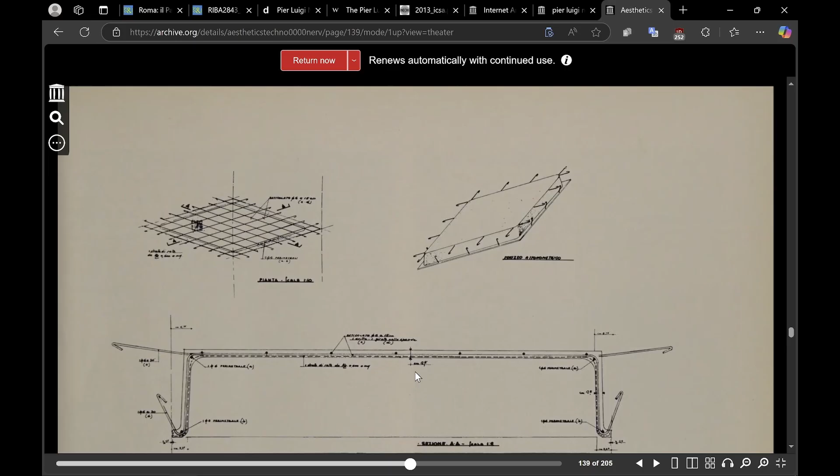And so if I scroll down here, this is the end result, obviously. But this is like his patent system. He used this ferro cement where you basically make this tiny thin mesh of reinforcing bars, and then you squeeze cement and sand together. And so it makes this very thin shell, right? And then you see here these little reinforcing bars stick out of it. And so you're basically casting the negative.

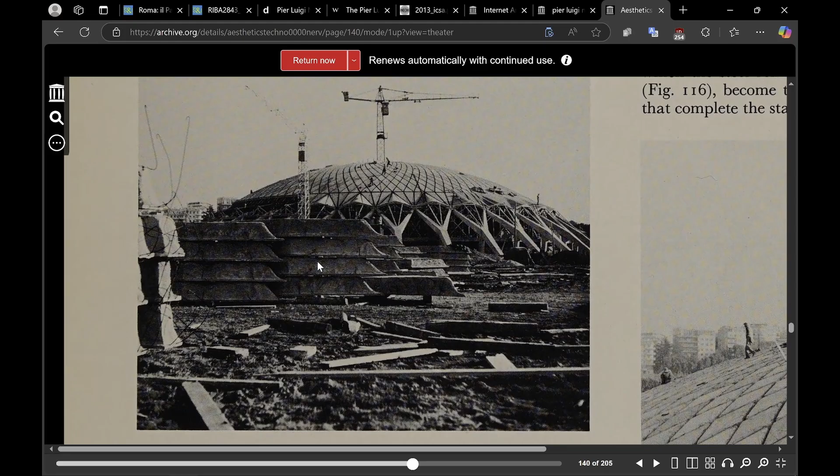And so if we go down here, you see right here, let me maybe zoom in so you can actually see what's going on. These are the precast members that are made from a mold. They're made from a masonry mold. And I'll go to another document to show you the masonry mold. But everything here is literally made on site and placed on site and poured on site.

And so it's just absolutely beautiful because the end result is so beautiful. But this is what I mean when I say it was done by hand. It's pure craftsmanship. This is parametric. This is like analog parametric. And I'm going to show you how to do this in Rhino, but in a very simple way. I'm not going to show you in Grasshopper. I'll just show you how to model it quite easily using very basic geometries and rules of geometry.

You could definitely model this in Grasshopper, but I am just going to show it to you in a very basic way. But again, these are people working on site, and these are the little reinforcing bars sticking out of the prefab parts, and then they would pour the negative, and that's how you get that ribbing. The ribbing is literally made by pouring inside this crevice here, right? And then they just pour the rest of the concrete over this, and the mold just becomes part of the structure.

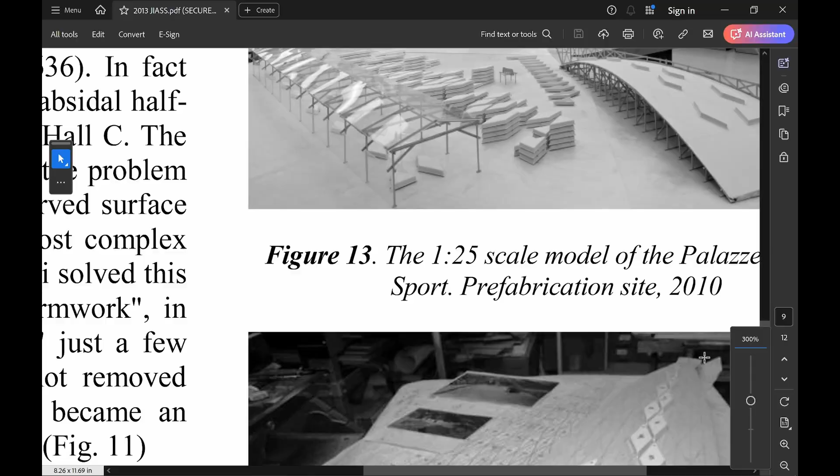And if I just go to this document here, you see this picture, it's just amazing, right? They're literally drawing on site, by hand, the actual profiles on this piece of wood here, right? And then they will build the formwork off of it. So let me just show you the mold that they make. Here it is. This is a really good photo.

Right here, they're using this mold. This would be like how you make a slip for ceramic, exact same thing. They're using this mold, and then they would build this little cage system here, right? And then they would pour, and these are the reinforcing bars, and then they would put the cement and sand together through this. And so you see right here, that's one of the molds here.

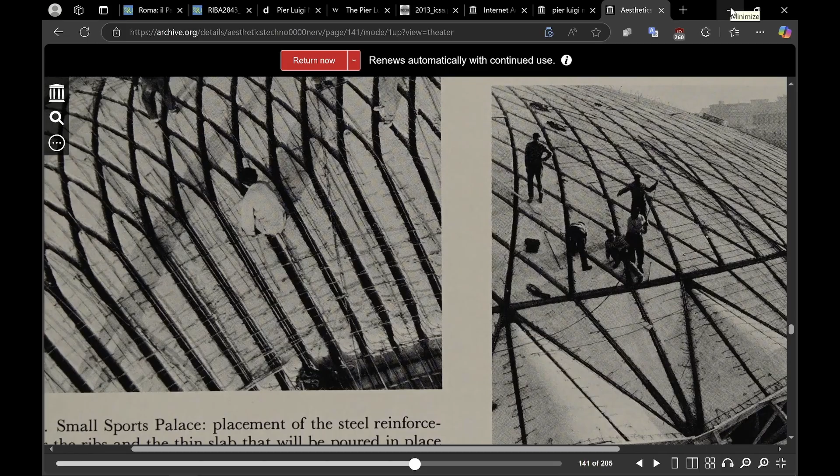This is absolutely phenomenal. So I'm going to show you how to build this in Rhino, and I'm going to keep it very simple. I'm going to use easy measurements. I'm not going to use the exact measurements. I'm going to use very close measurements. I might be off by like half a meter, because I just want to keep the numbers clean. I'm just going to use very simple measurements.

And again, I'm not going to go into a lot of detail about every tiny part, but I'm going to show you the main structural systems and how to model them in Rhino. So let's go ahead and get started. The first geometry that we need to establish is both the plan and the elevation. You can find a lot of plans online. I'll leave all my sources in the description.

The actual dome itself was first constructed from an approximately 49 or 50 meter radius sphere. And then they basically cut a chord off of the sphere to establish a 60 meter diameter shell from that sphere. So that's the first thing we're going to do. And if you look on the right here, I have very organized layers. You need to be very organized with this.

So the first thing I'm going to do is go to my curves sphere layer and make that active. I'm going to go to my top view and type in sphere. It honestly doesn't matter which image I use here. I'll just use this one for now, and I'll say this is my center right here. Let me turn my ortho on. I'm going to draw a sphere with a radius of, to keep the numbers clean, 50 meters.

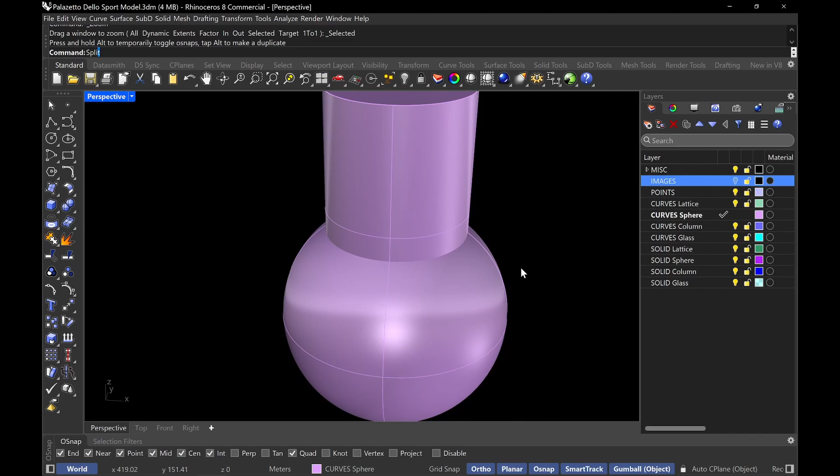Then I'm going to go to wireframe. Let me turn off the image real fast. Then I'm going to draw a circle from the center, and I'm going to give it a diameter of 60 meters. Now I'm going to take this circle and extrude it through the sphere to split it off. So if I do ZS, zoom selected, and I do split, there we go. This right here is basically the top of the dome. Great. Let me go back to top view.

Let me turn on the image, go to shaded. There we go. I can go to ghosted. So you see? Now, the next thing we want to establish is the actual boundaries of the structure. The outermost boundary is a 60 meter diameter shell. But the inner boundary of the lattice work is around 4.5 or 4.25 meters in.

So I'm going to dupe edge and offset in around 4.25 meters. Enter. Let me change the layer of this, put this on solid sphere. Now, this lattice work that you see here is made from a system called a Lamella dome. There are a lot of different types of lattice dome networks, and one of them is called a Lamella dome. And even among Lamella domes, there are different types.

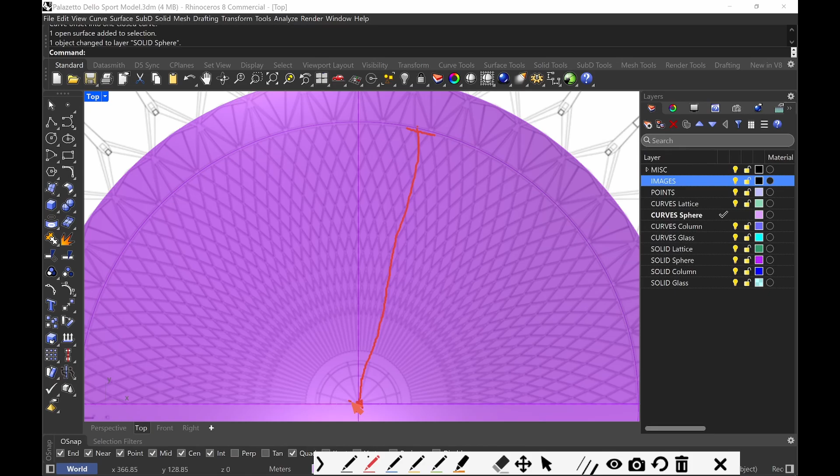We don't even need to trace this plan. I'm just using it as a cross-reference. But basically how it's constructed, let me turn my annotation on. If this is the radius right here, from here to here, we have this radius. The arc is basically the same radius as this inner circle. Or another way you can think about it is the distance of the arcs is equal to half of the radius. So this distance here is equal to 1/2 of this distance here.

And this is divided by 108 lattice works, and it has about 36 columns. So if I do divide, let me go to my points. So these are 108, but right now it's going in between every other one, but that's fine. I can just press enter, it's grouped.

So these, I need to rotate them about 5 degrees. Every column is about 10 degrees. If I turn my image back on, each of these columns is coming at like 10 degrees. But every other of these lattice works are at half of that, like 5 degrees. I can literally just rotate this over 5 degrees if I wanted to. See, I just typed in 5 degrees, and now I rotated 5 degrees.

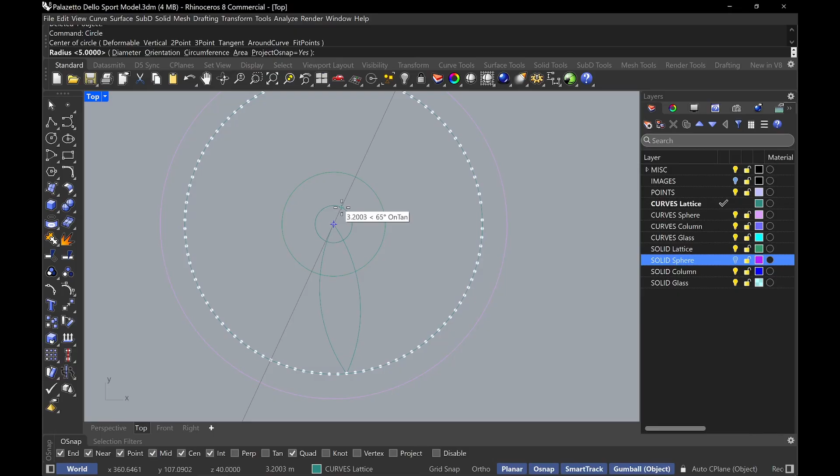Okay, the next thing I'm going to do is I'm going to draw a circle. That's like where the start of the cupola beam is. And I'm going to give it a radius of around 5 meters. And I'm going to offset it again 0.85. Like that. Okay, and then I'm going to draw a line from here to here and draw a line from here to here. Okay? And then I'm going to trim this arc off like that.

Okay? So this is what we have. So this is like the straight edge here, right? You see? And so I'm going to trim this off now. I'm going to trim this like that. And then I'm going to join these two together. Join. And I'm going to offset B for both sides, 0.06. Like that. So we have this.

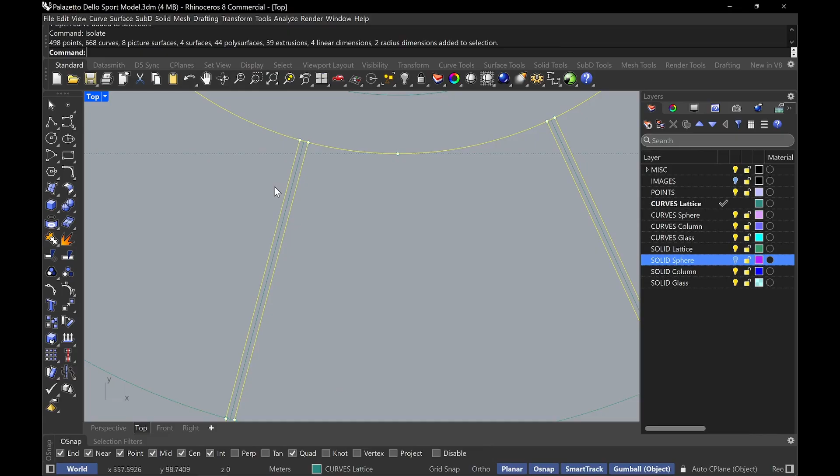Okay, great. So now what I want to do is actually, I want to do the curve Boolean command. So I'm going to select this, and I'm going to select these two curves. I'm going to do isolate. Okay? I'm going to do curve Boolean. And I want my output to be curves, right? So select curves. And combine region, yes. And I'm going to select inside of here. Enter. Great. So now I get like this closed curvature, you know?

And I'm going to unisolate. So we have this. So I'm going to select this one here. And I'm going to select these curves as well. And I'm going to project them onto the surface. So I'm going to turn on my surface here, my sphere, like that. And I'm going to do project. I'm going to project onto here like this. Great. And so if I go and I do ZS, zoom selected, we have this piece here, which I want. You see how it's closed off?

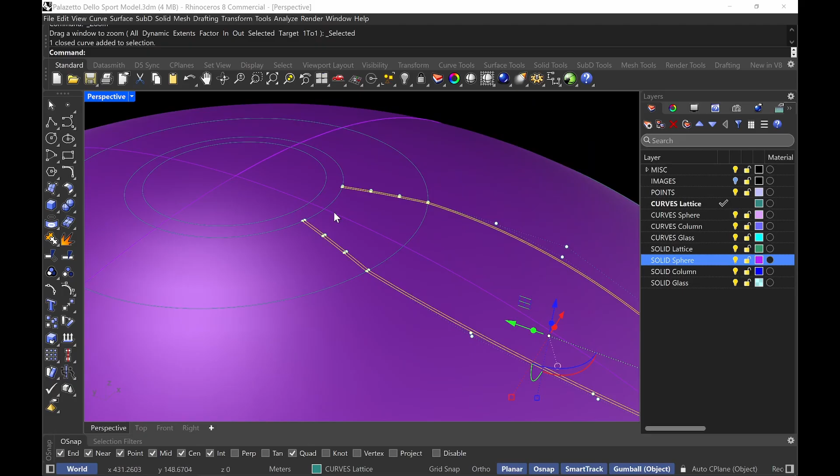Now, what I want to do is I want to copy this surface and paste it. Control C, Control V, okay? And I want to split this surface with this. If I do split, I want to split that with this piece here. Like that, okay? Fantastic. Now, I'm going to delete this, right? And now we're left with, you see how we have this surface piece here? Right? Let me change this to solid lattice. Okay?

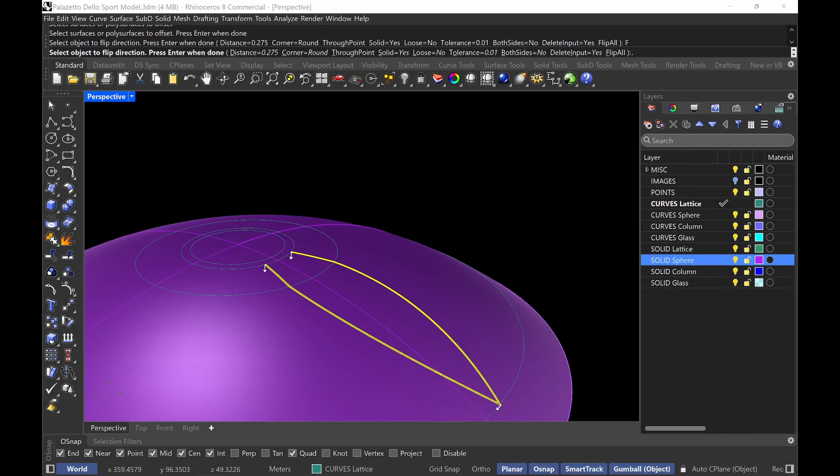And then I'm going to offset surface. And I'm going to select this surface. Enter. You see that I'm going to flip the direction. And the lattice is about 0.275 meters or 27.5 centimeters. Enter. There you go. So if we look underneath, you see? And it's a solid. And it's perpendicular, right?

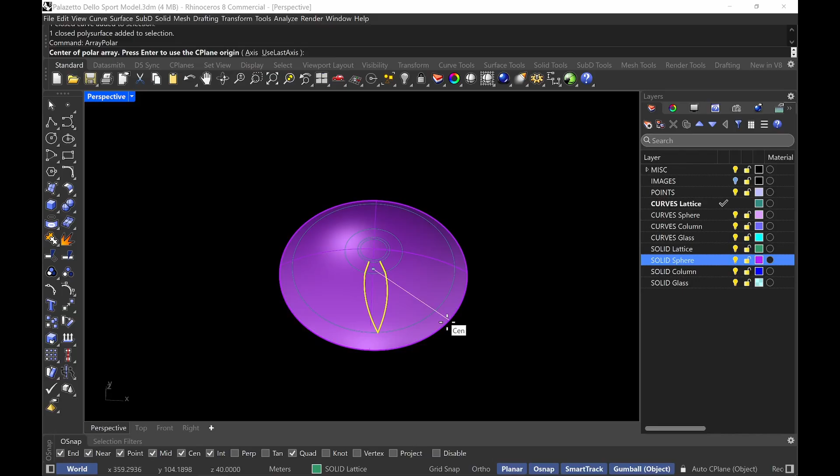So now if we do array polar for this. So you do array polar. I'm going to select the center, 108 times, and just accept 360 degrees, enter. You get this. You see? So let me just go ahead and hide the sphere for a second. So this is what we have. Right? I think it looks very beautiful. I mean, this is looking, in reality, right? These are kind of curved.

These are curved. I could have filleted before I projected it. I could have filleted this, but I just didn't feel like doing that because I just want to show you the basic principles of how to model this. Okay? Right? And let me just change the... I think it looks beautiful.

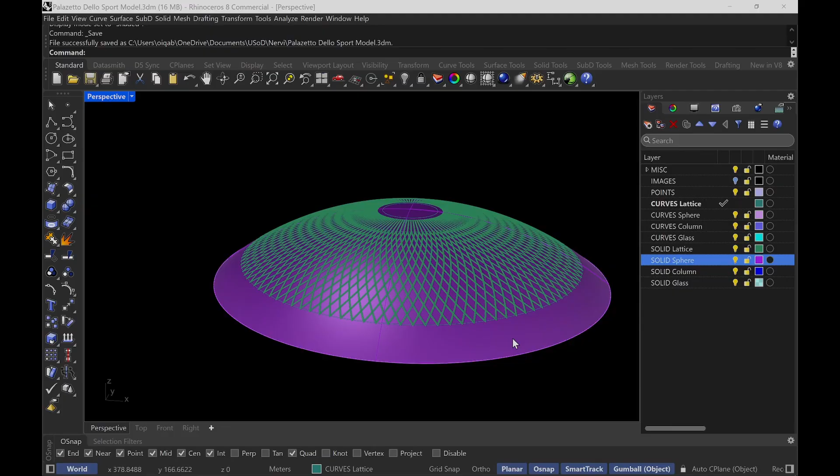Okay, so that's like the main lattice work structure. I'm not really worried about this piece. It's pretty easy. I can just split the surface, you know, and have that there. So we'll model that real fast. But this is like, you know, probably like 60% of the model. The next is going to be the columns, you know. If you notice, I haven't given a thickness to my sphere yet. I'll do that very last. But the sphere is around like 3 centimeters thick. So let's just go ahead and do this solid piece here. That shouldn't take that long.

So if I go ahead, again, I'm going to copy this, paste it, and hide it, because I always want to keep the originals of my geometry. This is just a basic modeling practice. I always like to keep the originals before I do anything subtractive. I can keep my history command on, but just in general, I always like to keep originals of surfaces before I give them thicknesses or before I do subtractions or Booleans, just in case I ever need to go back.

So this here, I want to split this with this circle here. So if I do split, select object to split, I want to split it with these two right here. Okay, so now we have this surface here. Okay.

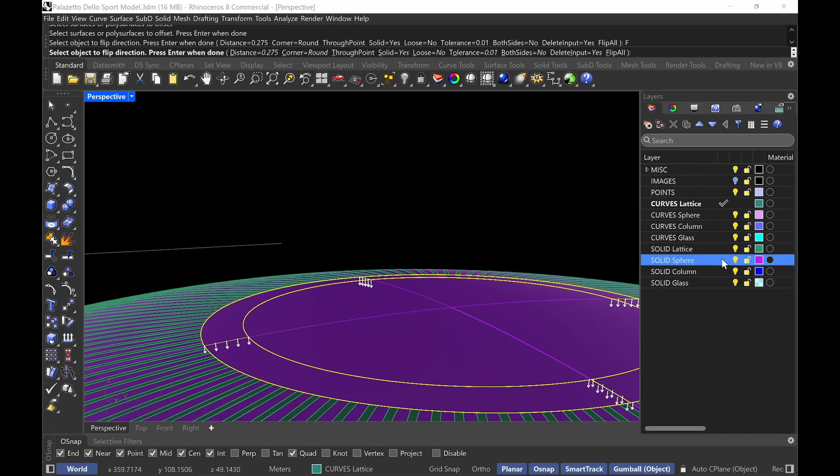And I can just offset surface down the same thickness, offset surface. And when we just flip it, the distance is already saved. Let me just make that active so it keeps it. Cool. I can hide this. Like that.

Cool. Now the next thing that I want to work on is the petals, the petaling of here. Okay? So if we look at the petals, look at this photo here, it's these right here. I have looked at a couple photos to determine whether this is curving or not. It's pretty hard to tell because in some photos it looks like it's curving. Other photos it doesn't look like it. Some photos it looks like it's a continuation of the sphere. Other photos it doesn't. But when you look at the actual interiors, let me just toggle through here.

You notice like a camber. You see there's like a camber to this. There's a slight arching to this. If I zoom in on here, you see? It's not the same distance all the way. There's a camber both on the bottom and on the top. So I'm just gonna assume that it's also a projection of the sphere. This is another photo, but you see how the thicknesses and the depths are kind of changing. There's again a camber to it.

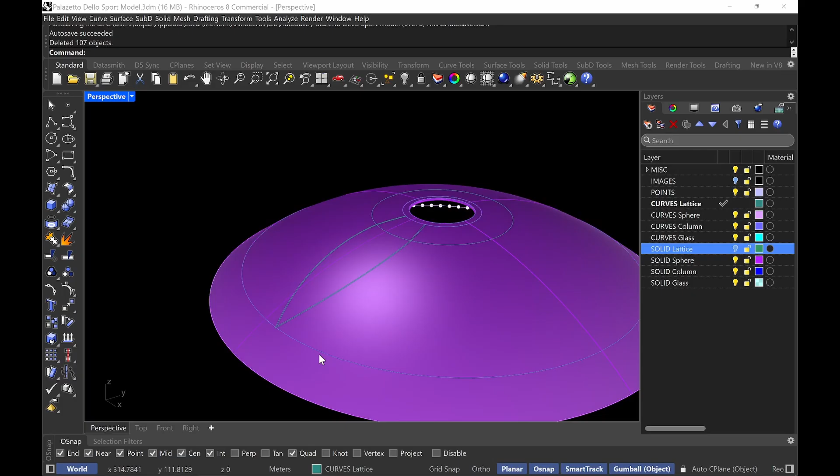Okay, I'm actually going to divide these. There's 36 columns on here. If we look at the image, any of these, there's about 36 columns. Okay. I'm going to divide this by 72 points because I need to go to the in-betweens as well. So there's 36 of these, but the columns are forking, right? It divides itself. So you need to divide it by twice as much to find the reference points. And the same thing with the petals.

So if I divide this, let me make my points active. I'll make that 72, right? So you see what's going on. You see? Now, what's important to understand is that it's around a 60-meter diameter whole, okay? In full, it's 60-meter diameter.

But it is actually pushed back like half a meter here. It pins forward and pushes back, goes forward, pushes back. So we need to offset this in a half a meter. Offset 0.5 meters and go in here like that. And then I'm going to project this up as well. So I'm going to project this onto that like that. Okay? And I can also divide this by 72. Like that. Enter. Okay.

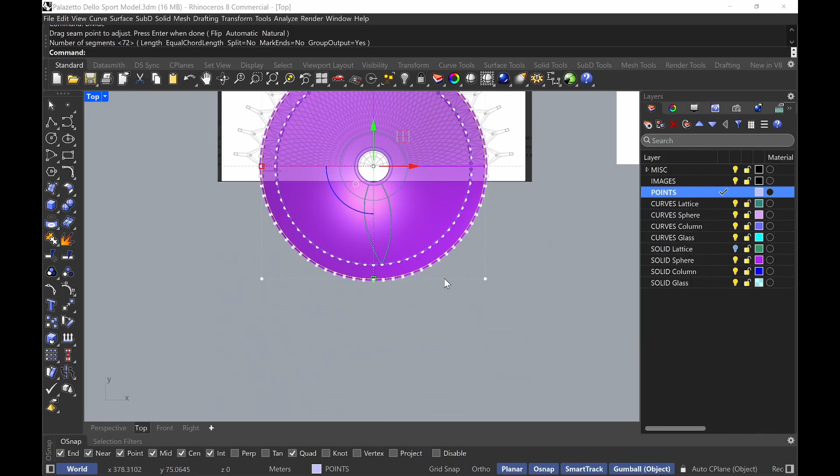So I know that the difference between this point, if I sketch this out, the difference between this point and this point is about 1.5 meters. So I can draw a line out from the center and go down 1.5 meters. That's one method. Or I can just subtract the total height distance from 1.5 meters, which gives me a difference of like 1.36, right?

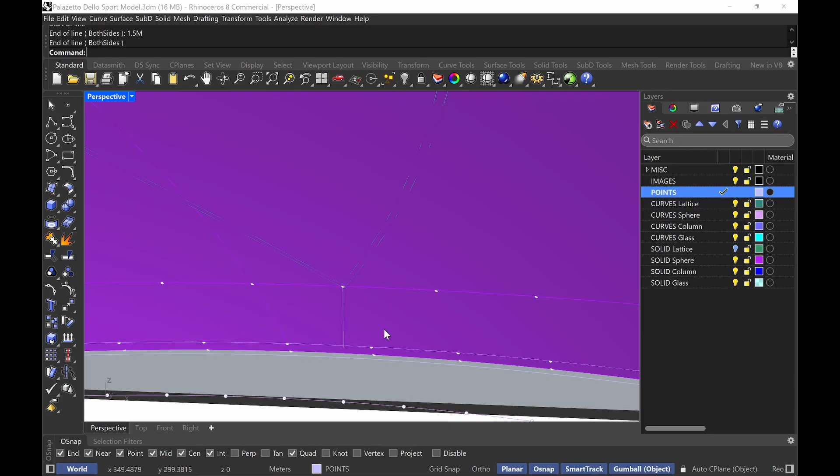So for example, if I draw a line vertical from here, and I go down 1.5 meters, right? This difference from here to here is what I'm looking for, right? So if I get a distance, it's about 1.3595, right? So honestly I can just draw that line. Vertical from here to here, okay?

And I'm gonna move it. So this is the high point, right? So I'm gonna move it here, right there, to this point, okay? Cool. So now what's going on, let me go back to shaded and turn this off. So what's going on is this line goes like this, and this line goes like that. You see? Okay, great.

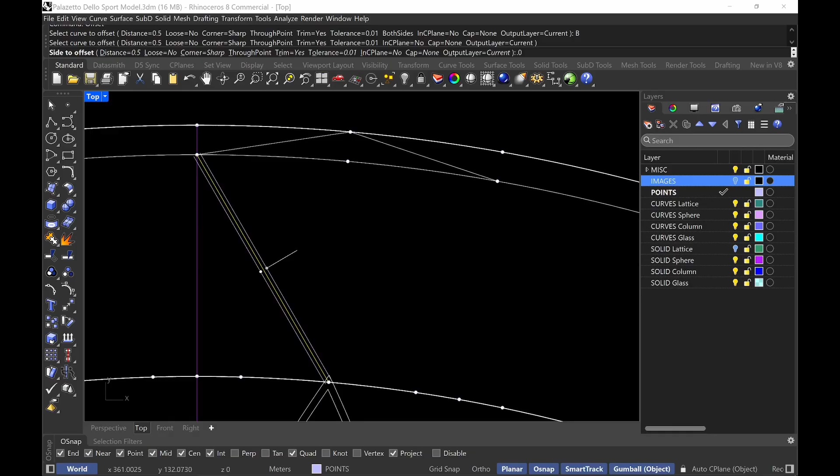So now for these lines, for the structure, I actually want to go to my top view. Okay? So if I go back to my top view, go to wireframe, and I'm gonna turn my project on. I'm gonna draw a line from here to this point, right? And I'm gonna offset both sides 0.5, like that, right? So it matches this.

So then I'm gonna draw a polyline from here to this point here. And then I'm gonna draw another line from here to here. And then also I can draw another line from here to here. Or I'll save that. And then offset both sides like that. I want to clean this up a bit, right?

So I'm going to go ahead and select some things and isolate some things. So I want to take these curves here, and let me go to perspective view real fast. So this is projected down. Don't forget we have project on, so it's drawn on the CPlane. And I want to take this curve here and this curve here. I'll take these points, and I'll take these points as well. And I'm going to isolate.

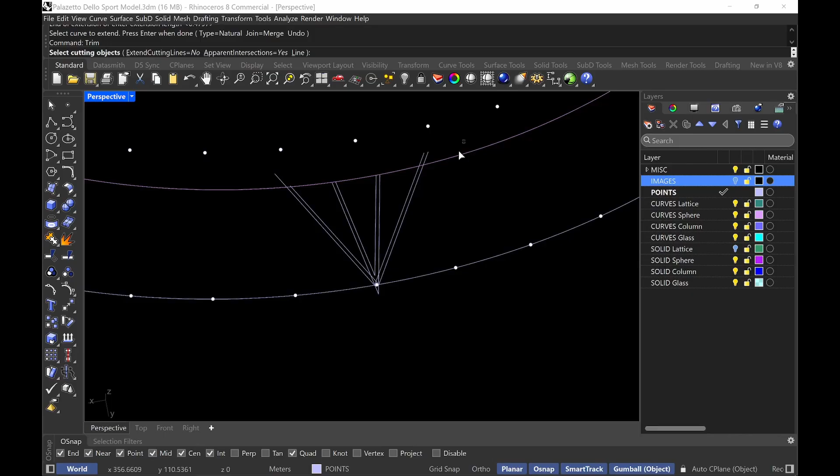I'm going to grab this and just pull it up to, let me turn project off. I'm going to pull this up to here like this. Great. You see? And I'm going to just clean this up. So I don't need these center lines anymore. Like that. Let me just extend these out. I can do curve Boolean and combine these all as one. Let me just extend all these lines out.

Okay, and then go to top view real fast. Curve Boolean. Select this. I want to make sure combine regions is on, output curves, and I can just select everything here like that. You see? It'll basically give me a closed curve. I can show you real fast. You see?

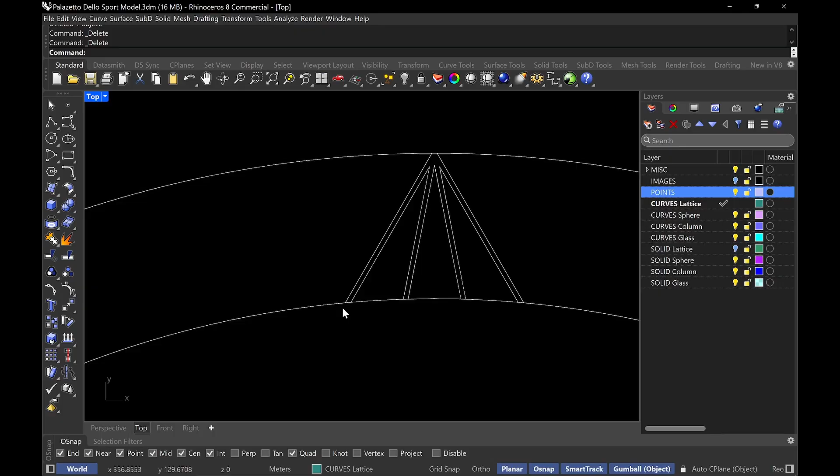Let me just do hide swap real fast. Right, I'm going to turn solid sphere on. Let me hide this top portion here. I'm going to select this. I'm going to project this onto this. Right, so we have this. Again, I'm going to control C, control V, and I'm going to hide, and I'm going to split this surface with that. Just delete, delete, delete, delete. Okay.

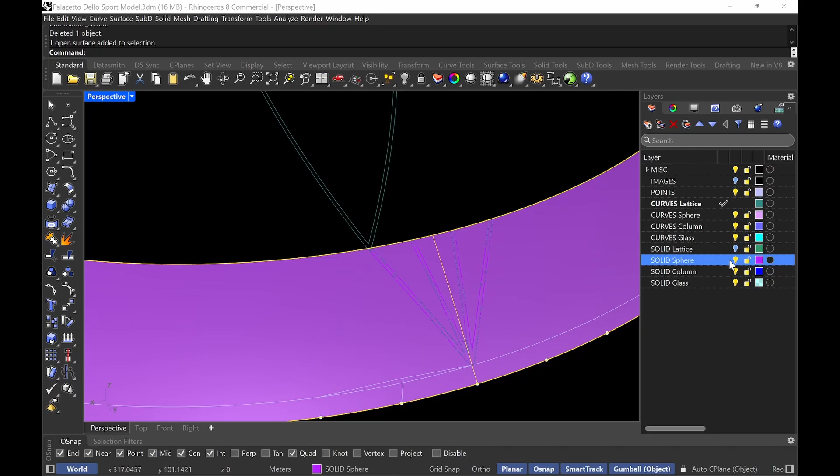The reason, just so you can quickly understand, let me change this surface, turn this back on. So we get that, right? And then I can offset surface, flip it. Again, it's going to be 0.275, like that, right?

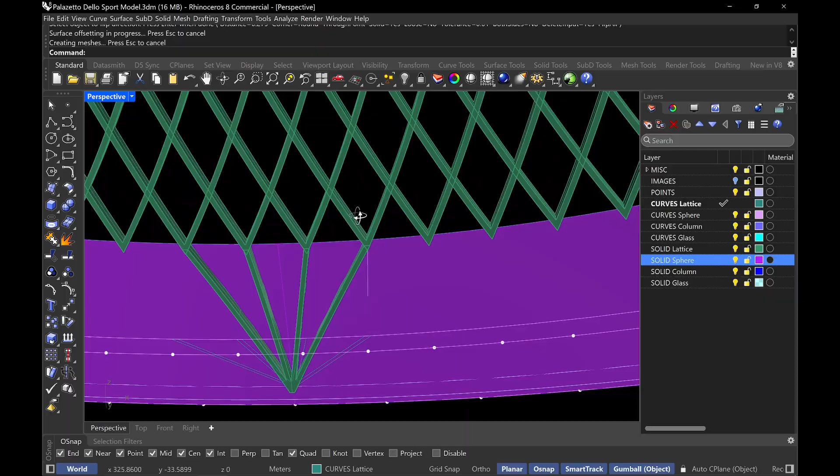And then I can array polar from the center, 36 times, 360, enter. Now we have this. You see? We have to do the petals, but this is the beginning of the petals. So if I do hide swap real fast, let me see which one I want to take. That one. Hide swap. Right, let me just go here.

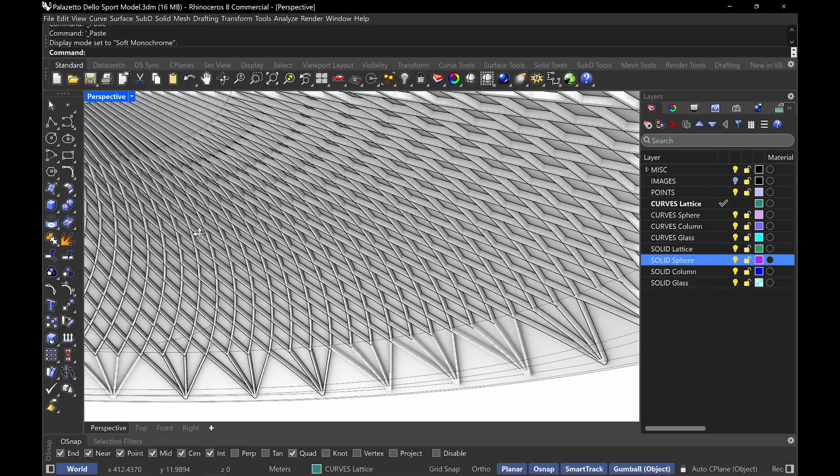So if we go here, we use this as our model. I'm gonna turn this off for a second. Just keep the lattice work. And let me do hide swap again and grab my points because I hid them. Let me grab these points here. Just do hide swap. Okay. So there's this curve here that I want to take. So I'm going to draw a line from this point here. I think I have these points in it as well. I should bring them back. Right.

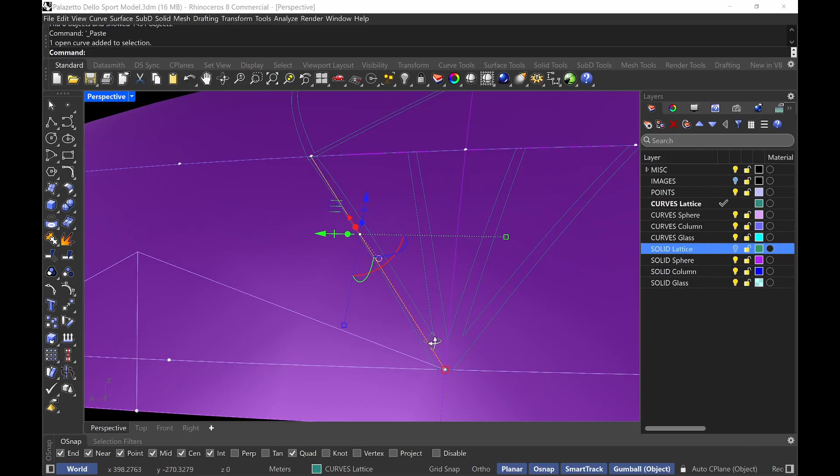So I want to project this onto here, like that, okay? And then I actually want to draw a line from here to this point right here, like that, okay? And now I can do a couple commands. I can do edge surface, network surface, sweep, loft, a lot of ways I can do this. I want to do the edge surface command, because you have to have open curves.

So I can select this curve and this projected curve here, right? And I'll get a surface like this, okay? Now, what I want to do is I want to actually mirror this.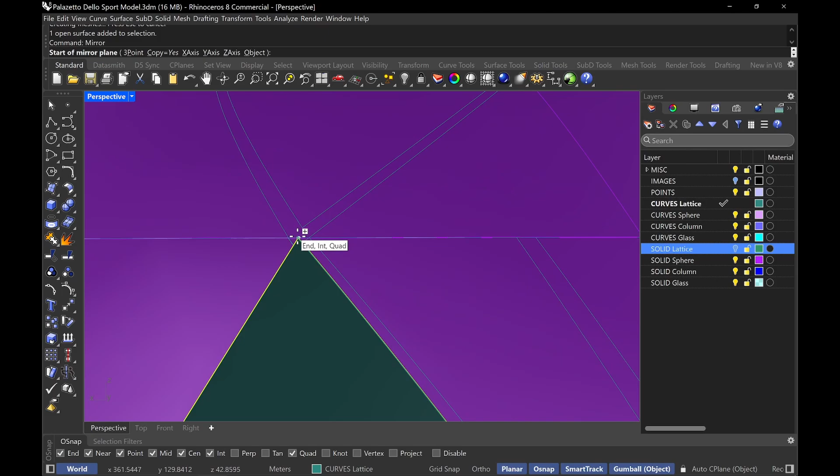Like that, okay? And then I'm going to join these two, and I'm going to do fillet edge. Right now I have it pre-selected as 1 meter radius, which is fine, right? Press enter. So I want it on both sides, like that. There is a curvature to this, and so it's around 1 meter in radius, I would say.

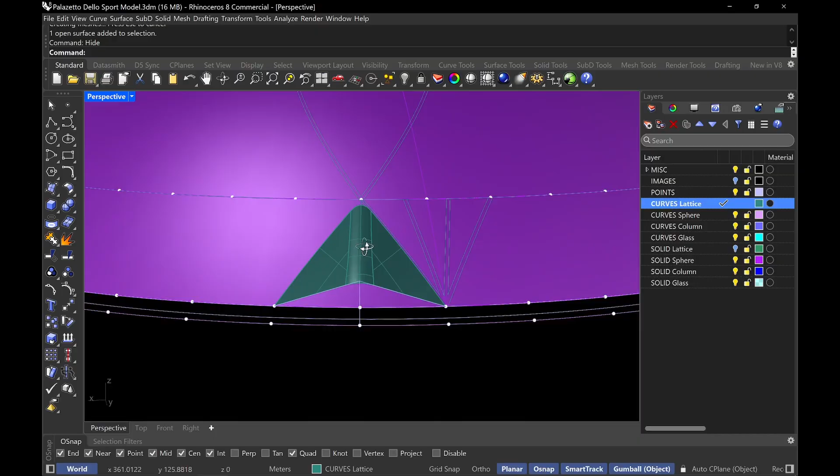And so if I do the intersect command, I want to intersect this with this, and so I get something like this. Now I actually don't need this anymore. So if I do split, I can hide this because the actual true 60-meter diameter is from this point here. That's where it is. And I can prove it to you on Google Earth. I'll show it to you later. So what we have here is this and this, you see?

And I want to go ahead and just array polar this and split it. So I'm going to select this, and I'm going to select this, and I'm going to isolate, and I'm going to do intersect this and this, right? And I'm going to do array polar from the center of this circle, just snap till you hit the center. There we go. I'll do it 36 times, like that.

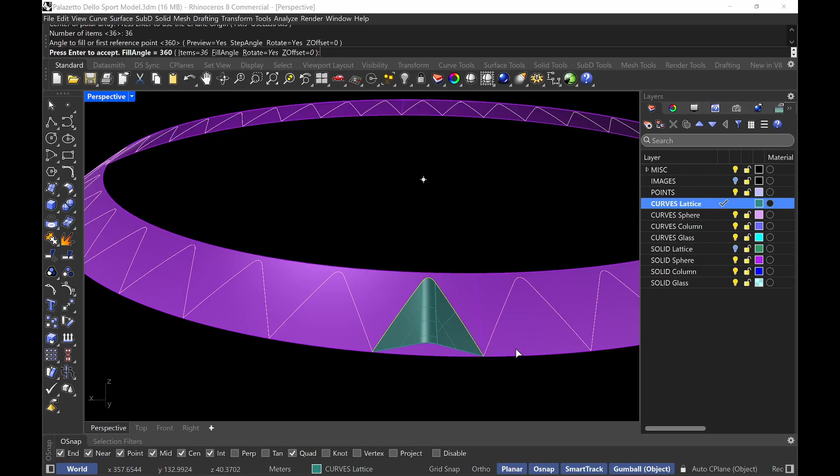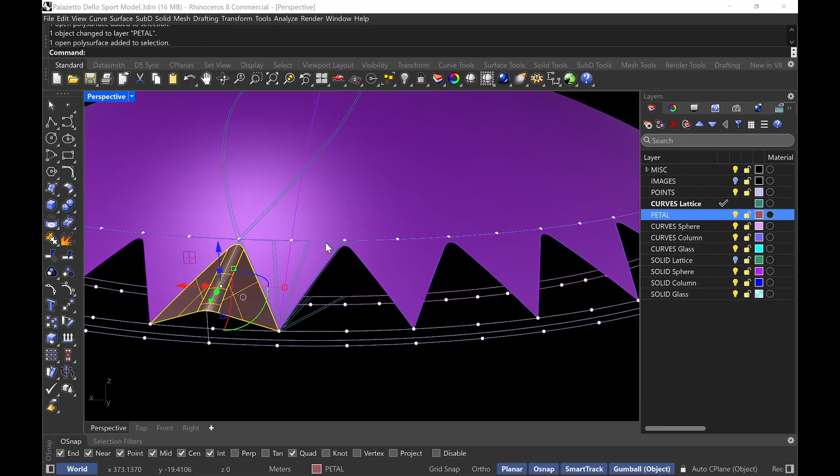Enter. And I can do split, and the cutting objects will be that. So I can just go ahead and just remove these now, right? I'm being silly. I can just lock this. Right? You get this. I'm going to make a new layer and call it Petal. Great. I can also array polar this as well. Array polar. You see?

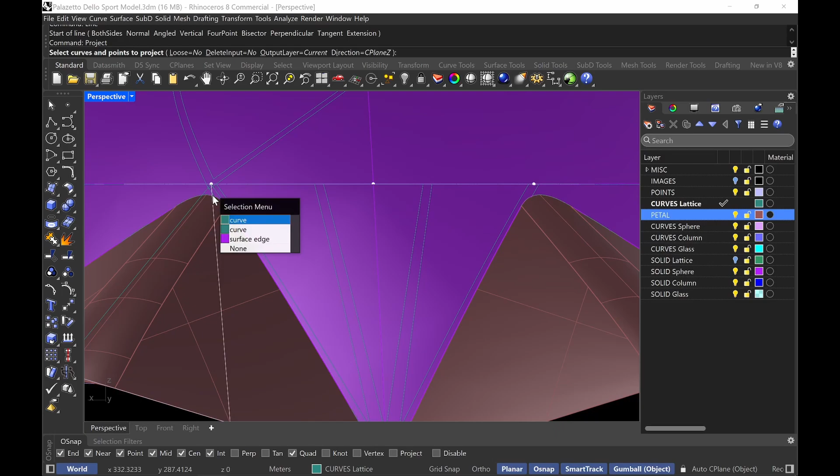And then I need to do the two smaller pieces here that basically hit the midpoint. So if I draw a line from this point to somewhere on the mid like that, I'm just going to take it and project it onto this surface. There you go, like that. So I'll select this here, and because it's already perpendicular to this, the gumball is aligned to object, so it's perpendicular. I'll just do 0.15. It's not that deep of a member.

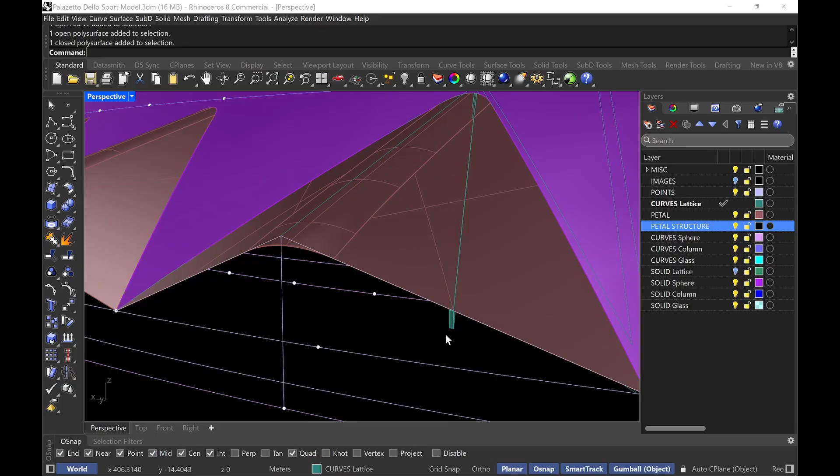Rhino does this sometimes where it'll do the opposite, and it's kind of annoying. It's a Rhino 8 issue, but it's okay. So I'll just go down like that. And then I'll do offset surface. Both sides. I'll do like 0.03 because it's really not a thick member at all, to be honest. And then the same thing with this edge here. But let me call this Petal structure. Okay. Just mirror this on this side, and we'll also array polar this as well.

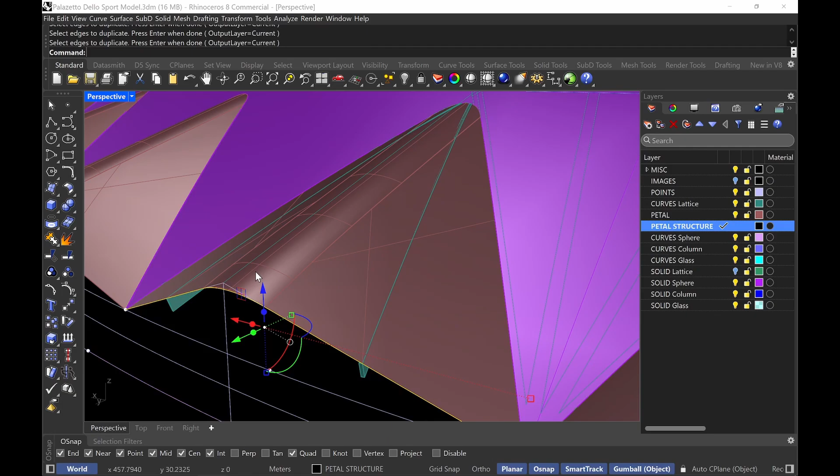So if I do dupe edge, join it. I can extrude it down. And I'll also just offset surface.

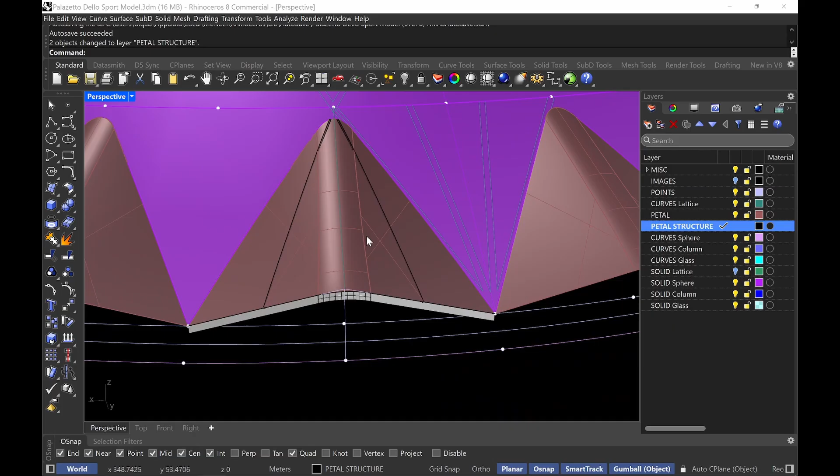So if I do select, let me select petal structure. Array polar. I'm gonna hit the center. Center. Enter. Great. So let me just turn everything on. Let me... there we go.

We have to do the ring beam. There's a ring beam right here. But that's just going to be pretty much guesstimated. But there is a ring beam there. It's such a beautiful structure, though. It's so elegant, so simple.

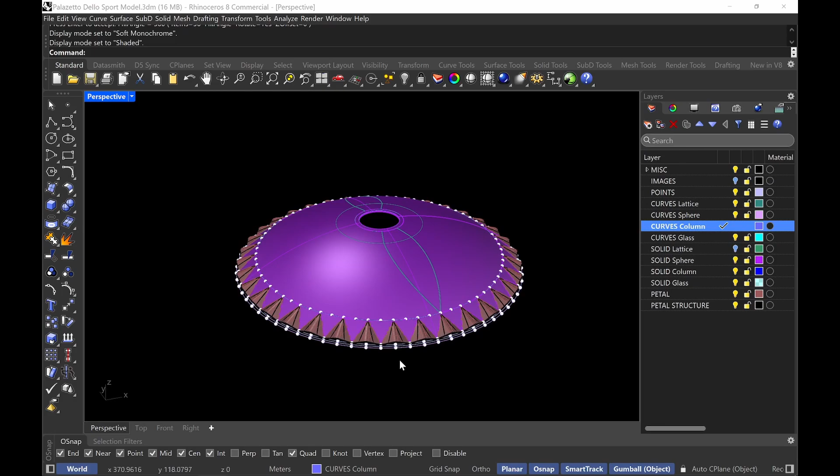So if I go back to Google Earth and measure this, from like here to here. See, it's like 9.2. It varies, but the projected length is around like 9 meters, 9.5 meters from that long point. Right? So if I draw a line from here, I can do projected right now, from here to here. 9. Right?

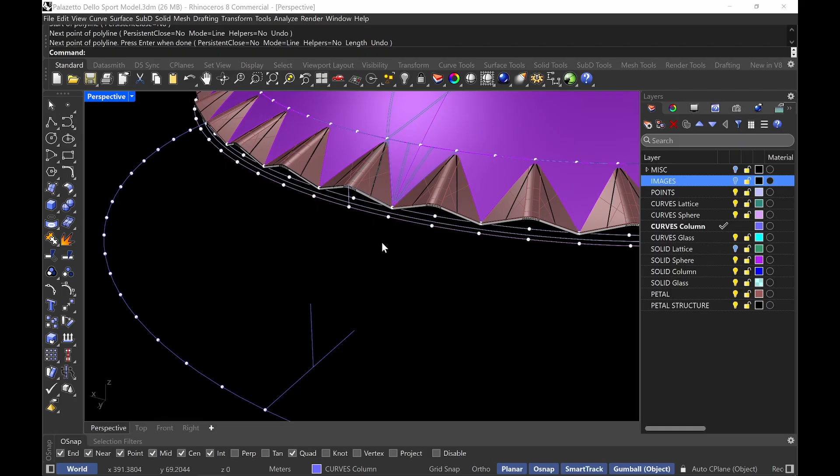And then I'm going to draw a line from the midpoint, vertical. I'm going to draw it up around 4.5 meters, like that. And so actually, because I want to isolate some things, I want to isolate this and these points, these curves, and these points. Great. And so I want to draw a P line from this point to that point to this point here, like that.

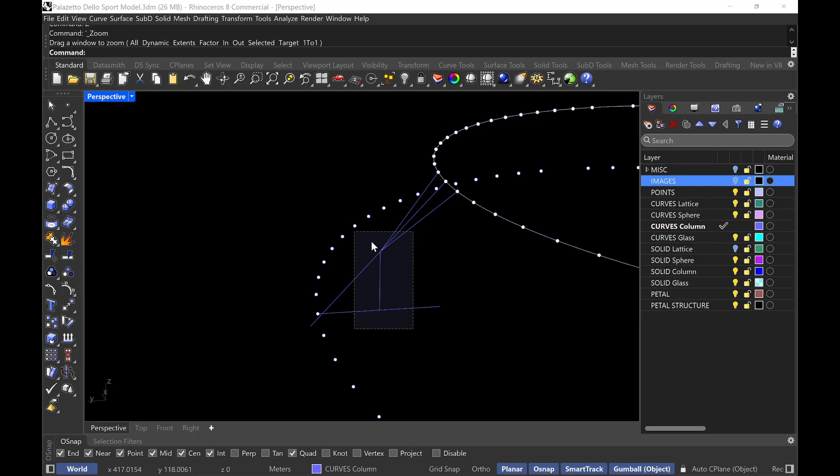Now, I can draw a line from here to here, like this, and I can extend to see where it hits, like that. So it's a little bit short, you know? If I look at this, yeah, so I can trim like that. So we can deal with this length here. Now this is tapering, okay? So what I want to do is draw a couple of curves here, a couple of rectangles. So right here, the width of the taper, I can measure it from here if I wanted to.

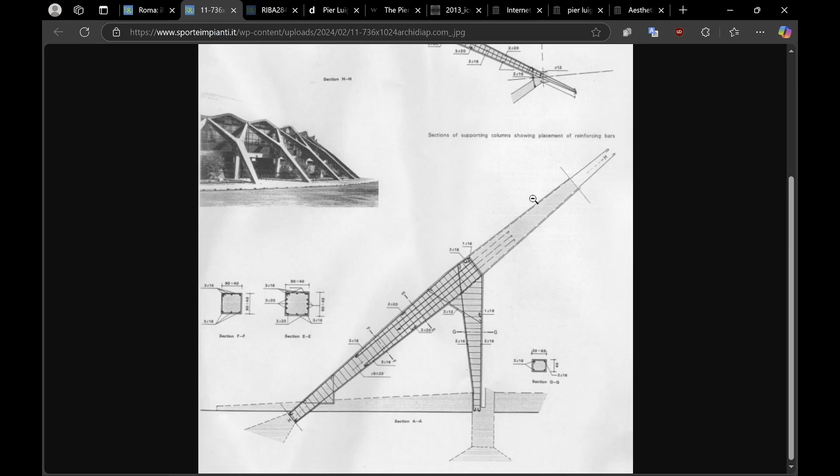If you see here, this is a great reference of the column cross section and the drawings. There's this Italian website that I found that actually has them. This is pretty well detailed. Open image, new tab. Right here. This is very detailed. But yeah, the column tapers. And so basically this is like a reinforcement plan.

And if you see here, the reinforcing bars are also concentric. They're leading down to the center. The main reinforcing bars are always leaning down to the center, like the vertical or lateral. You see? They go down to the center. And so I guess the arms of the column are also pointing towards the center. They're tapering towards the center. So that's really important to understand.

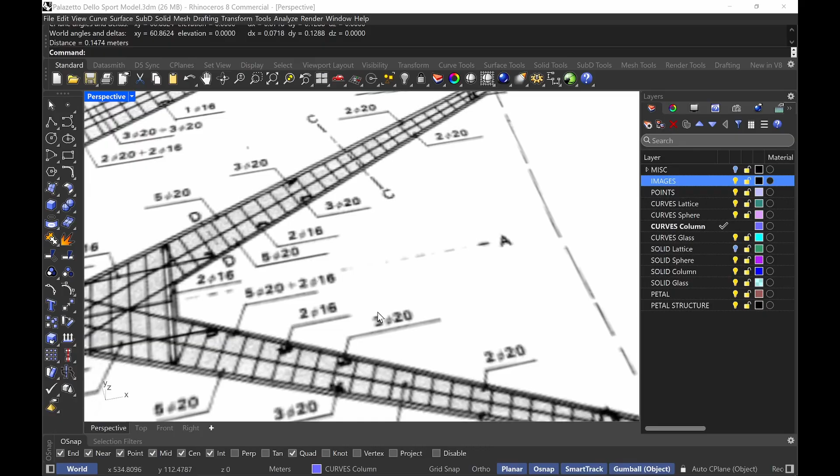And then this has like this leg that's here. Okay? Like that. You can go in and measure the thinnest point here and the widest point here and the widest point here. And that's it. Or you can basically trace this if you want to, but I want to do it from cross sections of the thinnest and widest points.

So I'm going to do the rectangle command and do the A for around curve. And I'm going to select this curve right here. And so for the length, which is, in my opinion, the depth, I'm going to put in 0.4. And then for the width, I'm going to put down 0.25. Like that.

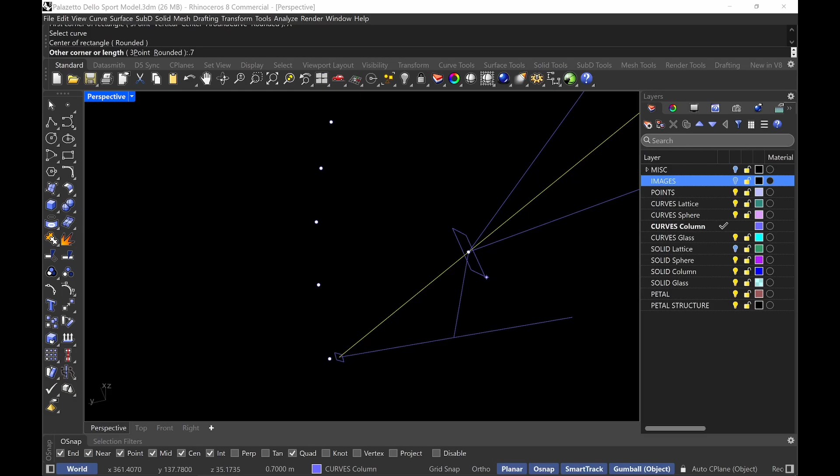So if you look at this, what's going on is that in this elevation, there's this point where it does that basically. It goes like this. That's what it's doing. So this pretty much stays the same, but then this is tapering out. So I want to copy this down.

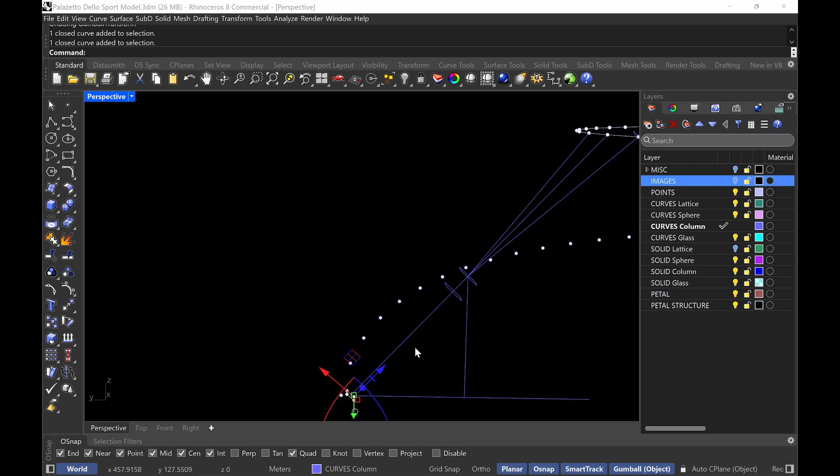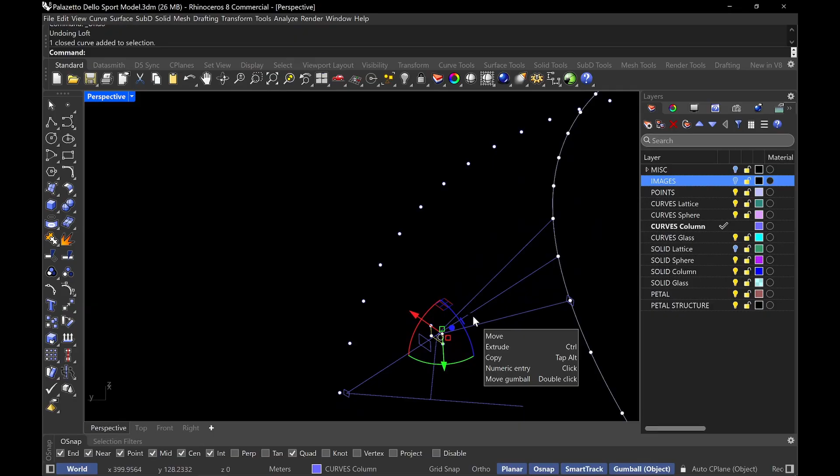I'll go in negative 0.75, like that. Okay. So let me show you, we can loft this, right? Like that, you see? But it also starts to get even a little bit wider. So if I take this out, I can even measure it too, just to show you my workflow.

This is like the widest part, right? Because it starts to flare out, and there's like a flap here. So it's like around 0.5, 0.4, because this is projected length, not true length. Just go up 0.5, right?

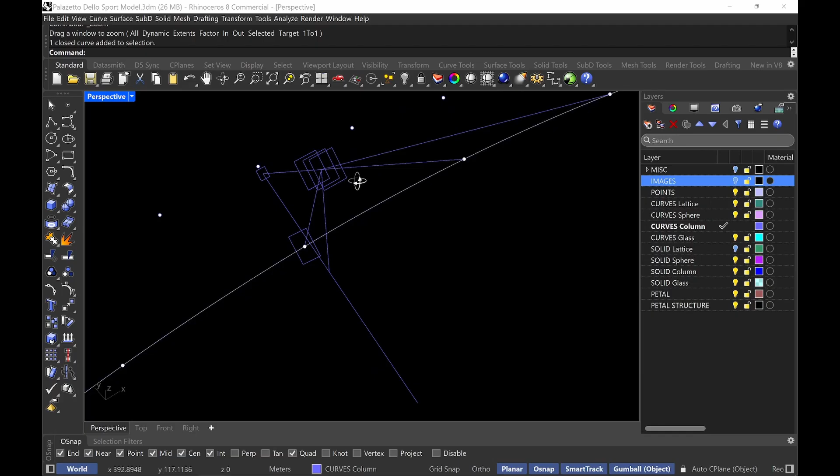So this should scale a little bit wider if I measure it, but it may not look proportional. That's my only concern. So if I go here and I go to images, it's like 1 meter. So I'll do like 0.9. I'm gonna draw a line out here, 0.9.

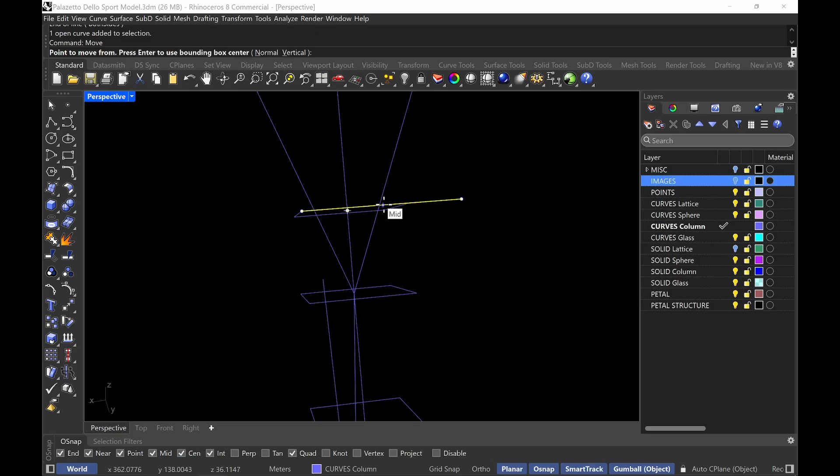Move it from the midpoint. Still seems a little too wide, to be honest. I feel like it's going to flare out a little too wide, but it's okay. Scale 1D. Like that. So if I take this, I can take this one, this one, this one, this one, and loft it. Make sure the seams are all aligned, right?

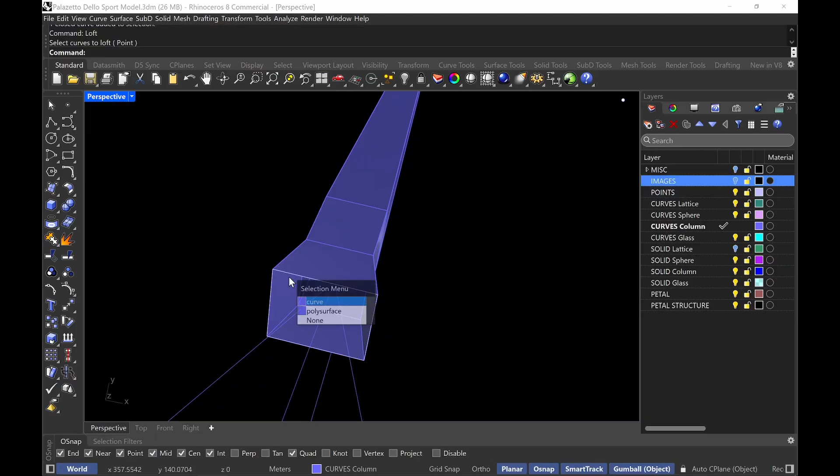I'm going to do straight sections. I don't know why I was like that. And then I'm actually going to take this same curve and I'm going to copy and paste it twice. And I'm going to just scale 1D and go from here to the midpoint. Like that. But I'm actually going to just go in a little bit more than that to leave a little bit of the flat.

Just a little bit, not too much. I'm doing this by eye, by the way. Let me turn the center snap off. In general, this line should be in the center of this, but I don't feel like doing it like that. Then I can just copy it. There we go.

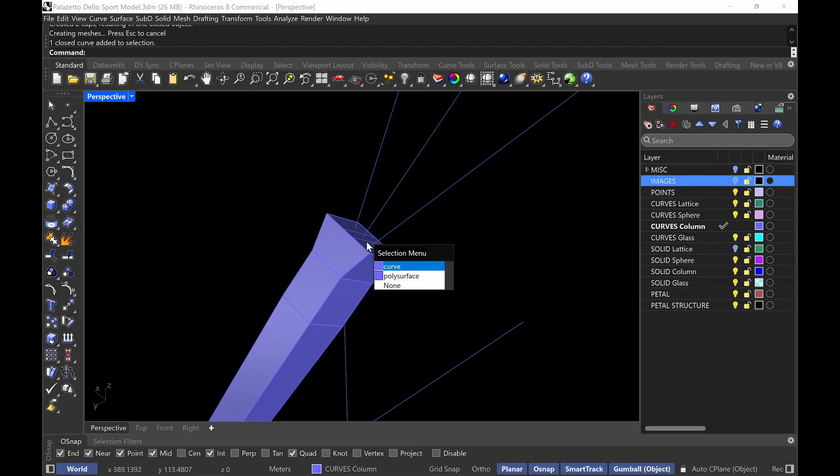And so I'm going to cap this. I'm going to loft this to this. Make sure your seams are always aligned, you know? Okay. Same command. Loft this. Oops, I forgot to do so. Do rectangle around curve. Select this. Go here, and that's going to be 0.40 by 0.25.

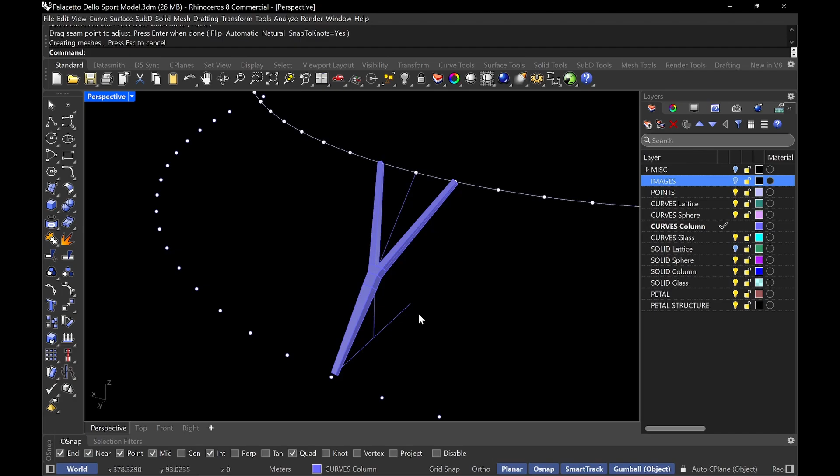Loft this to that, you know? Mine looks maybe a little bit too skinny. It's okay though. And then the same thing for these cross sections here. I'm going to do a rectangle, around curve, select here, 0.30, 0.25. Yeah. Just going to move it right there.

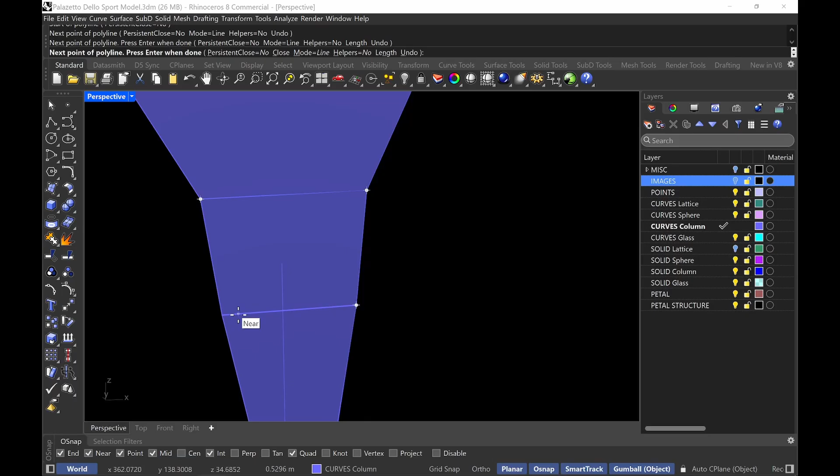And I'm going to do a polyline that just traces it, because I know this is straight. Right. And I'm going to do the intersect command. Intersect this with this line here. Gives me that point right there. And so this curve here, I'm going to scale 1D from this point to this point, and it's about 0.30.

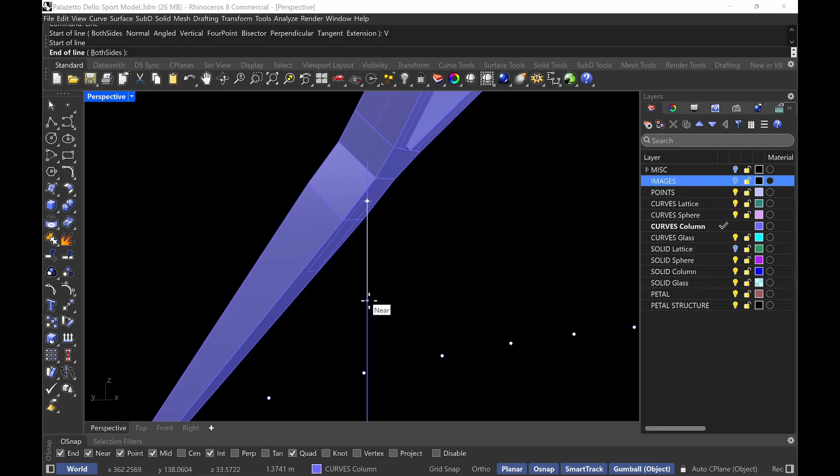Very wide, 1.35. And I'm going to move it from this midpoint to that point right there. You see? And then I'm going to do one more rectangle. Let me draw a line vertical. I'm going to go down 1.15. I measured these, by the way.

So if you're trying to know where you get these measurements from, I got rough measurements from these columns here. So if I turn this on, I'm measuring these. For example, I'm getting the widest cross section here. I'm getting this cross section here, right? I'm getting this distance from here to here. I'm getting this cross section here, and then I'm just going to loft them. That's all.

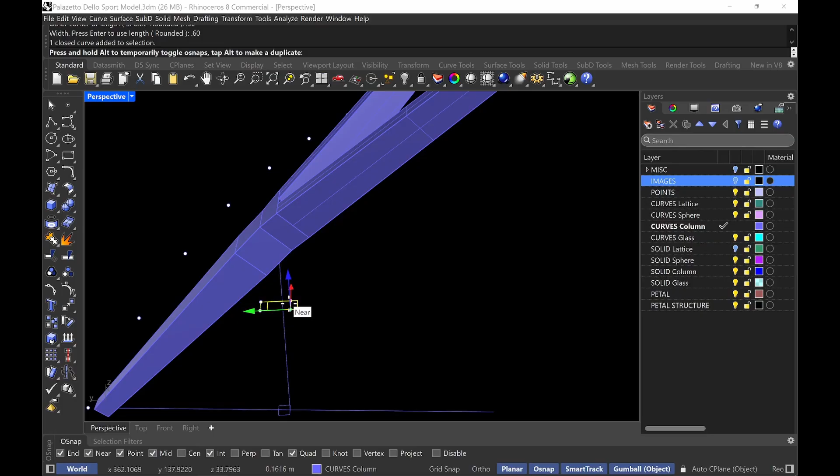Rectangle, around curve, select curve. There we go. 0.30, 0.60. Move it here like that. And then I'm going to do loft. This. Again, you have to make sure your seams are connecting. So, for example, I'm going to move all my seams to the back corner because they're all straight. Move that back there like that. Right? That's what I want.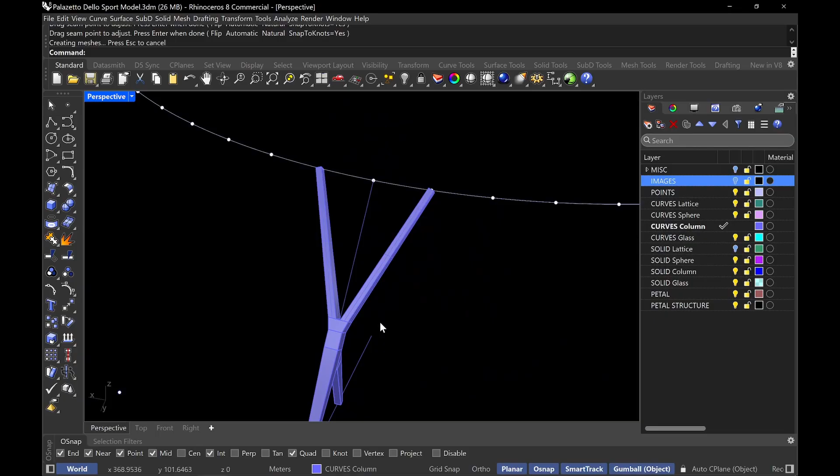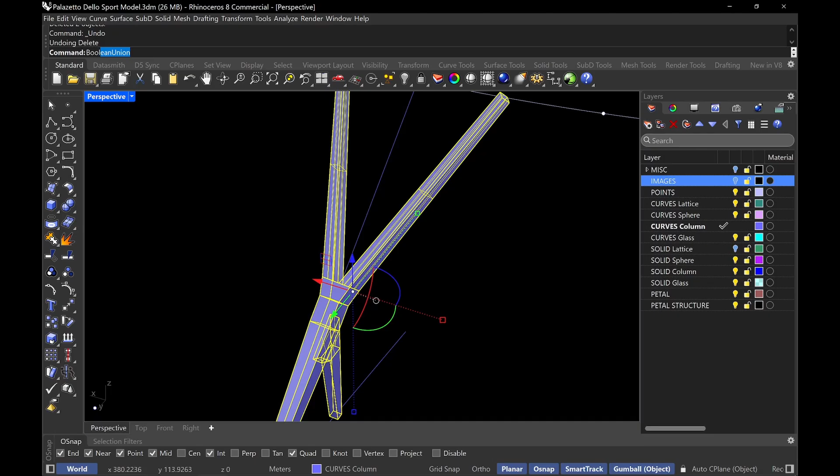I want all of these like that. Right? I could push this back more if I wanted to, because that's where it kind of aligns. And then let me just cap. I can select these, Boolean union. Cap that. I'm not sure if it's touching or not. There you go. All right, it's all one piece now. And then I can array polar this from the center.

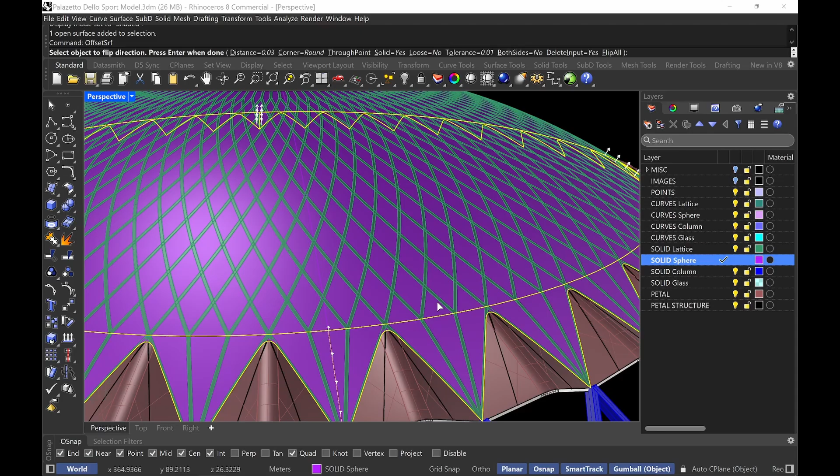And isolate. So this is basically all of the structure, right? It's very elegant. I think it's such a beautiful design. We can give the surface a thickness. So offset surface, it's around 3 centimeters. You know, same thing here. Like that.

Okay, the other things that we can do on here is we can do the glass and we can do the little ring beam, which is pretty easy to do. And we can also do the cupola if we wanted to. This video is very long, so I don't want to prolong it even more. I think it's important to do the ring beam because that's part of the structure.

So if we actually go back to the original, if we do hide swap, we can take the original right here, right? This is the original sphere. And we can also copy this curve, Control C, and hide swap. So we're going to paste it, and we're going to isolate it, right? So we have this curve here that's already been projected on here.

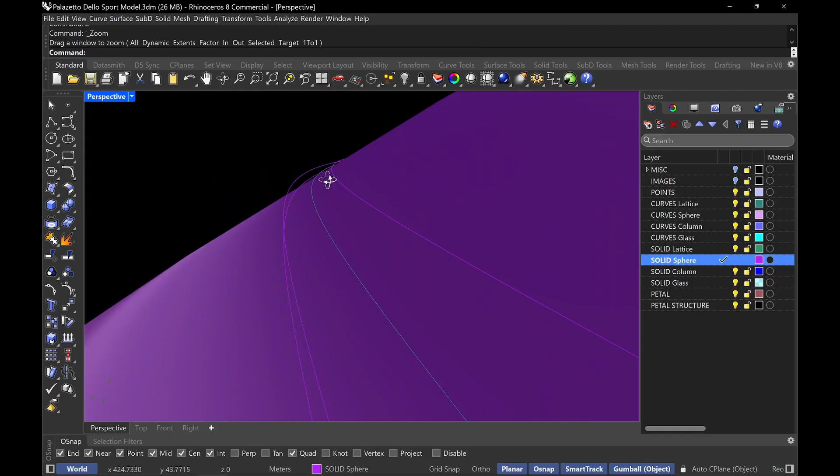So I'm going to offset like 0.09, and I'm going to do both sides. It's important, both sides, like that. Okay, so I'm going to take this curve and this curve that was offset both sides and project it onto this surface here like that. Cool. Now, it's a little hard. I'm going to zoom in on here. I want to take this one and this one. You see? Let me just group them.

Split this surface from this. There you go. And then offset surface 0.275. Make sure I want to flip the direction. There you go. You just switch the layer to solid lattice. There you go. And then if we go inside, you see? We look at the photo. Go to rendered view. Got the beam there.

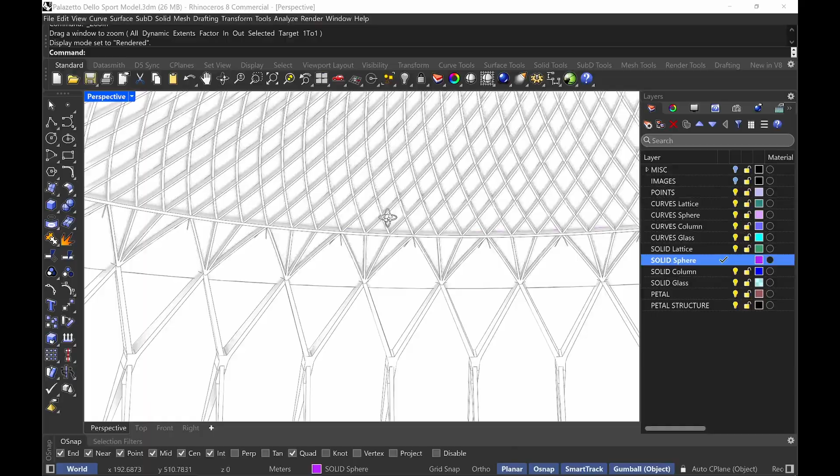So now we have a solid sphere. Let me just make this active. Right? We've got the petals, petal structure, right? It's a beautiful structure. It's absolutely beautiful. Just so elegant, you know? Can't believe this entire thing was built out of pieces.

And then let's just do that. I mean, the glass has nothing to do with the structure, but I just want to do the glass. It's actually pretty good. Offset. Yeah. Like that. Like I mentioned earlier, I should have probably pushed this back more, but that's okay. Right?

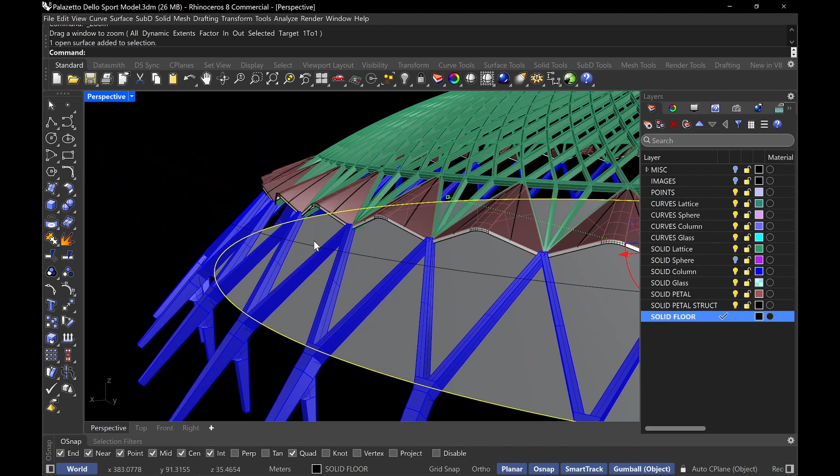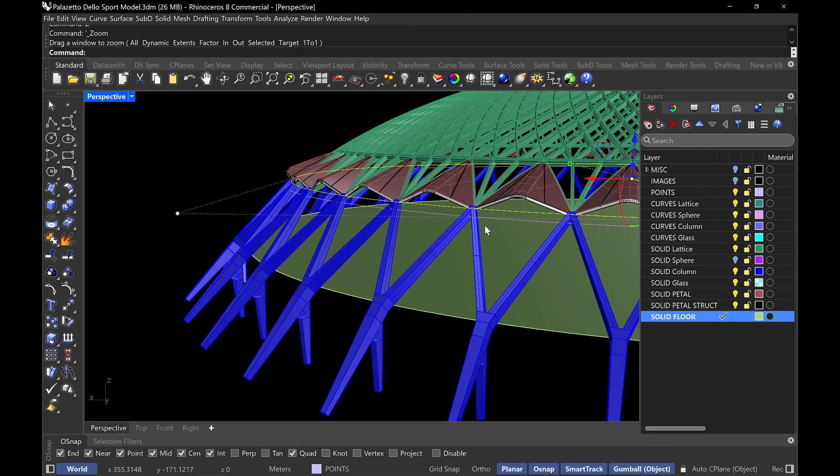And then if I do hide swap, I want to grab a couple of things, right? Like I want to take this curvature here, which is really important, and this curvature here, which is also very important. Bring that back here. Right, so I'm going to duplicate this down here like this. And first thing I'm going to extrude this up like 1.15 because there's like a solid piece to this, right?

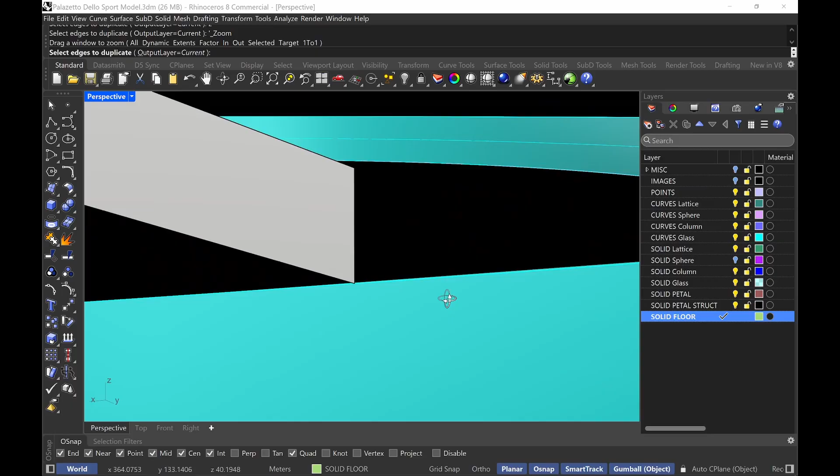And then if you look at photos, basically extrude ellipse is like glass. You can extrude this up to this bottom edge right here, like that. I don't need this, right? Change this to the glass layer, like that. Can dupe edge. This.

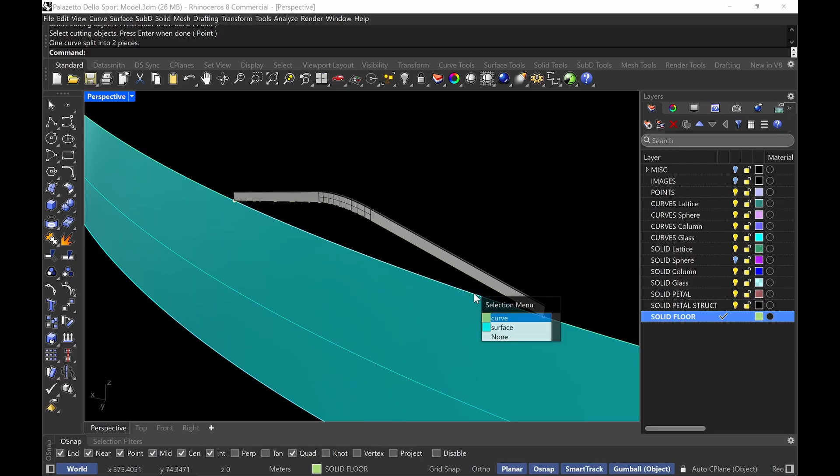So I'm going to go ahead and join these. And then I'm going to intersect this with this edge here. You get these 2 points here. I'm going to dupe edge this one, and I'm going to split this curve with this point and this point, like that. And I can do edge surface, I can do loft, and loft this, like that, right? You get this glass panel here.

And then same thing, array polar. I can do the mullions and stuff, but this video was really made for the structure. Array polar from the center. Well, actually, before I do that, I'm going to change the layer to glass. There you go.

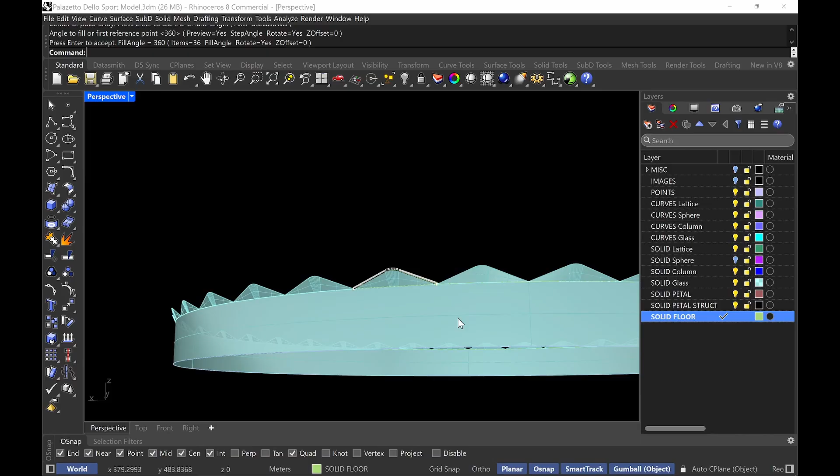I hope you found this helpful. Again, this is really a study of the structural analysis of Nervi. I could have modeled the cupola, but I just didn't feel like it. I really want to focus on the structure of this more than anything else. And so it's such a beautiful work that everyone should study because we still apply these systems today. This idea of taking something regular and applying it in a parametric fashion is something that we still do to this day. But it's amazing to see how people can do this by hand, just by drawing form.